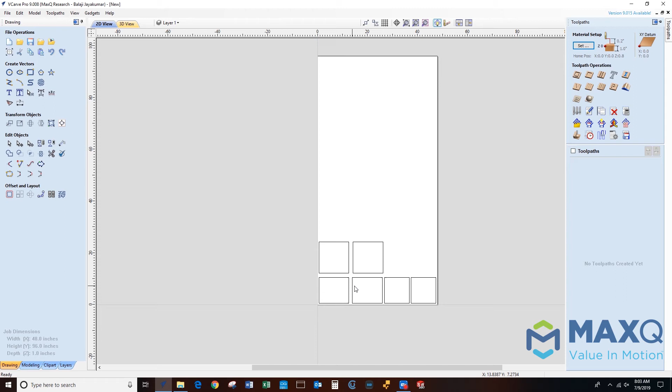So let's get started on making these toolpaths. We know for all 6 of these panels, it's just going to be a standard profile cut. So what we can do is select them all. We'll hit J on our keyboard to make sure all of the vectors are joined. Looks like they are. All 6 of them are closed. That's good, so we'll close that. And then we'll go back over here on the top right to toolpaths. We'll select profile toolpath, and that brings us to our toolpath options.

So there are a lot of options with your tools, but we don't necessarily use all of them, so don't freak out. Let's just start at the top. Cutting depths. Our start depth is the depth that your end mill is going to start cutting. That is always left at 0. You don't want to put it at 0.5 because that means your end mill is just going to plunge through a 1-inch thick piece of foam at half an inch. So don't do that. Leave it at 0. 0 will be the top of the material.

The cut depth. I always go a 1/16 extra over whatever thickness you're working with. We have a 1-inch board here, so I'm going to make the cut depth 1.06 inches, 1 1/16. I do that because sometimes the CNC bed is not perfectly level, so it might cut out panels on a certain section and leave some panels partially cut. That's really annoying to deal with, so I just go a little bit deeper and give it a 1/16 more. So start depth is always 0, cut depth is always the thickness of whatever you're working on plus a 1/16 of an inch.

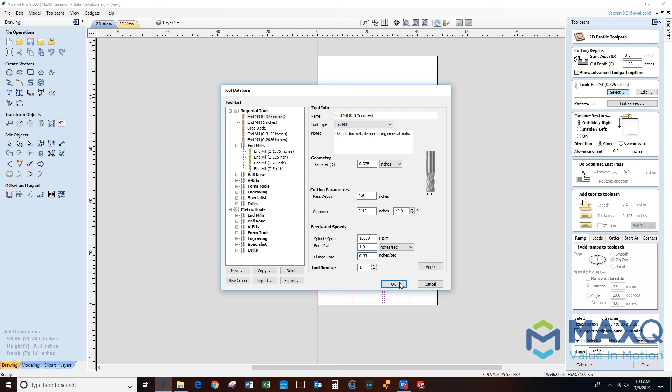And so that is how you can select your tool and select your end mill and play with the parameters a little bit. So we'll go ahead and press OK. Sometimes this toolpath thing will slide away from me. If it ever does, just click toolpath on the top right and bring that ribbon back out.

So the next thing, after you select your tool, we have a 3/8 end mill. Now we need to tell the machine how many passes we want it to take. So a pass is basically the depth. How many times does the tool have to travel around a certain shape for it to be cut out? In general, when we're cutting foams, it's basically 2 passes per inch.

So if I have a 1.5 inch thick piece of XPS, I would do 3 passes. If I have a 1 inch thick piece of XPS, 2 passes is perfect. If it's a half inch, you could do 1 pass. So basically it's 1 pass every half inch of foam. So we have 1 inch of foam, 2 passes is good.

You can see up here, this yellow stuff here is our material, and the red line is where that first pass is going to take place. That's how deep in the material the first pass is going to go. If I do 4 passes, you can kind of see how it incrementally will cut down.

You want to do higher passes when you're dealing with thicker material. You're cutting metals and woods and stuff like that. You really want to bump your number of passes up so that you can cleanly cut through those materials and not just tear it off the table. But foams, low density foams, it's just fine just to do 2 passes and get it done and get out of there. So that's good. We'll go ahead and press OK for that.

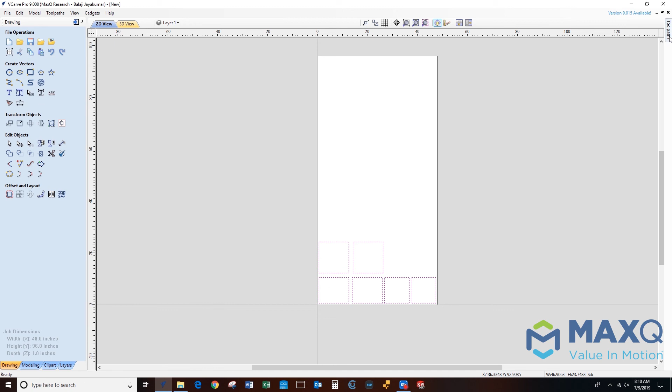And now we will do the machine vectors. So this is actually pretty important. This dictates the orientation of the end mill as it's doing profile cuts. So you can see this rectangle here, and this little red line, these yellow balls indicate the tool. So what this is saying, an outside right cut, is that the tool will follow on the outside of the vectors and travel in a clockwise direction.

So if I click inside left, you'll see that tool change. So now the tool is on the inside of the vectors, traveling in a clockwise direction. The way that we design these panels is we have the OD being what we want, 12 by 12 here, 10 by 10 here, and 12 by 10. So we want that tool to cut on the outside of those lines, not on the inside and not on the line, on the outside of the line.

So that's a really important parameter to make sure that is correct, or else your panel is going to come out 3/8 smaller than what you planned for. So we'll go ahead and go down to the next one. Pretty much all of these next parameters you don't ever have to touch. These top 3 are the most important: cutting depths, your tools and passes, and then your machine vectors. Those 3 things are the most important, and they're the only things of any importance on this. We don't have to mess with any of these.

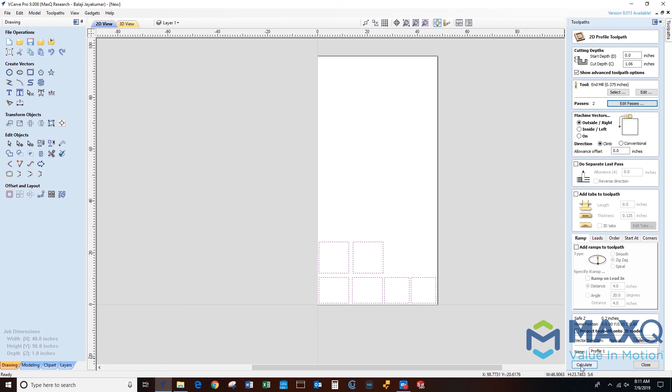So once those 3 have been addressed, we can go ahead and press calculate, and you see this little window pop up. It says you're cutting at a deeper depth than what your material thickness is. We know that. I explained why we're doing that, so we'll go ahead and just press OK. We know that we have a bleeder board out there and everything's safe. We know that we wanted to go a 1/16 deeper than the material thickness, so just press OK.

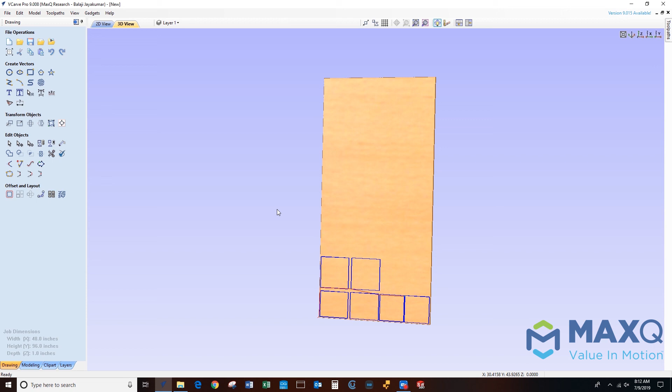And you see yourself go into this kind of a 3D zone here. With a left click on the mouse, you can control this board, and if you ever want to go back, go ahead in this top right corner, you can zero it to whatever axis you want.

The Z-axis is what's perpendicular to us, so if you ever move it around, you can just click the Z-axis and bring it right back. This is a 3D space is what this is.

If you want to go back to the 2D space, in the top left you go back to the 2D view. 3D view, 2D view. So we'll click on the 3D view and show you what this does.

After you press calculate, it brings up this preview pane, and you can watch the job you just set into motion. Some jobs can take a long time, and the speed's pretty crazy on this software, so our jobs are usually pretty quick. Just drop the speed all the way down, or else you won't even be able to watch it—it'll just be over in a millisecond.

If I press play, preview all toolpaths, you'll start to see all of them being cut. There's 2 passes on each one. You saw how fast that was in itself. If you turn the speed up and try to watch this, it's just instantly over. So just turn the speed all the way down if you're watching previews.

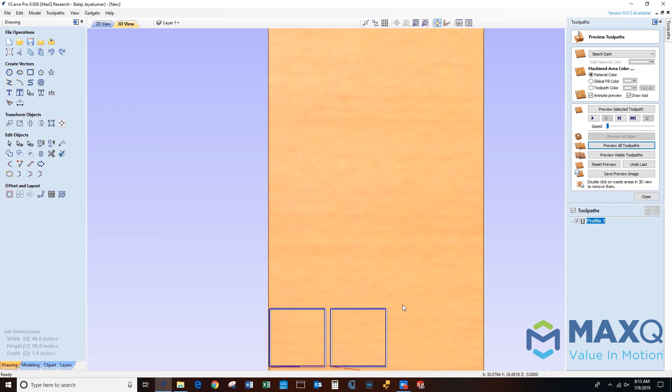This can be important—it can tell you if you actually do have enough room between these panels. Like right now, I probably wouldn't cut these because they're just too close together. You don't want to leave no room for error. If it's too thin in between panels, the end mill can actually start to slide the panel out of the way and mess the dimensions up. The vacuum can't hold vacuum that well if you're cutting them this close together.

These top panels here, that's a good amount of material you want between them. All of these down here, I would say, are too close. You really want to give them a solid inch between each other, just so there's enough material to keep them held down. So that is the preview pane—preview all toolpaths, just watch what you did and make sure it makes sense. You can reset the preview and watch it again if you want to.

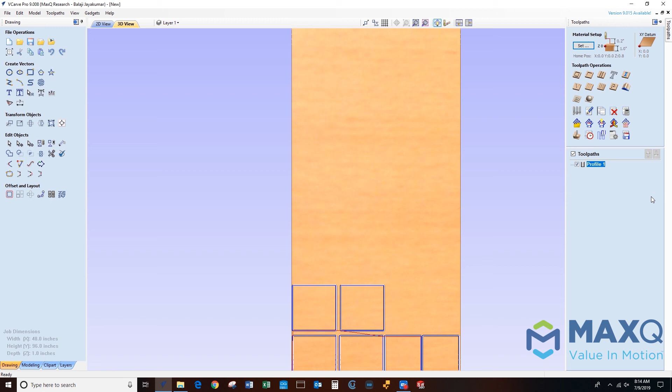So that's what that is, a cool little feature. Once we're happy with it, we can just press close and get out of this. Now it's the same as saving those drag knife toolpaths—we have our toolpath right here that we just made.

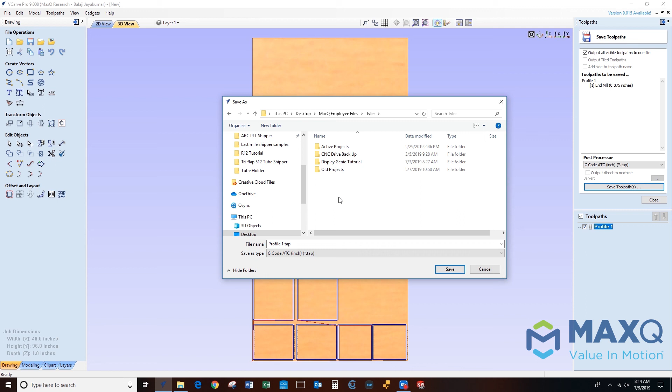It's a 3/8 inch mill, 16th inch cut, and what we can do is, in the bottom right hand corner, save the toolpath. Save toolpath again, and we can just go on the desktop or flash drive, wherever you're saving it, and save it. So say we'll just make a V-Carve tutorial folder.

The naming convention whenever you're saving mill CNC cut jobs is we'll just call it what it is. So we'll say this is an R12 foam panel set, and then you have to tell the user what end mill they should use. So we'll say 0.375 end mill, and that is good for the naming convention.

So tell it what it is, and then say what end mill you're using. That way, if another tech or somebody else needs to use this G code, they don't have to wonder if it was a 1/2 inch end mill or a 3/16. You're telling them right here, this is a 3/8 end mill, and this is what you're cutting, R12 foam panel set. It is a .tap file, so we want G code, and we'll press save.

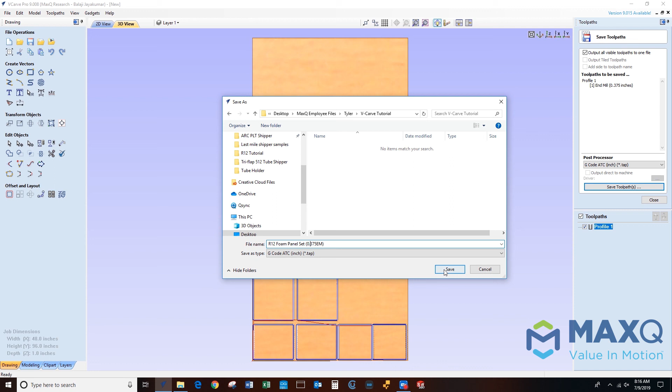Also, same as with the plastics, we go back to 2D view here—you need to save this V-Carve file. Just because you save the G code into your flash drive or wherever doesn't mean this V-Carve file is saved. So on the other side, just save as the V-Carve, you see .crv.

That way, if you need to make any changes, say these panels were too close together and moved, you had to come back in here and make adjustments, you don't have to start completely over. You can just use this same V-Carve file. So make sure you do save those. We'll go ahead and press save.